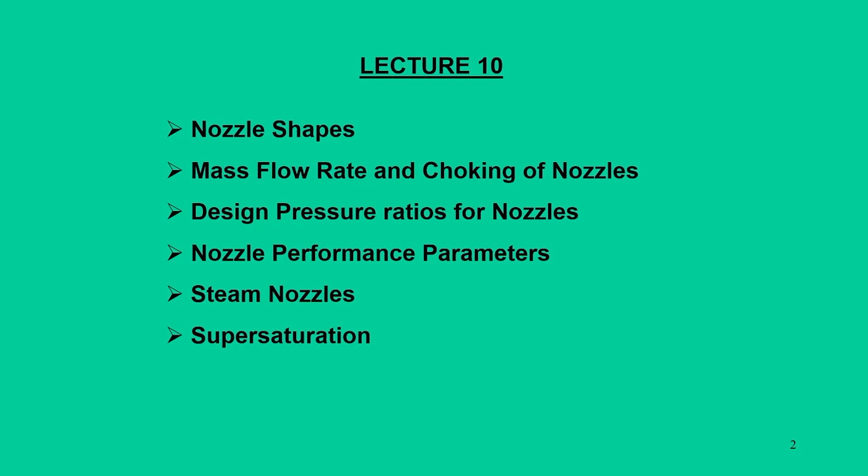This means that nozzles can be designed for gas, which may be a perfect gas, or for liquids, water, or any incompressible fluid, or for steam nozzles. Steam nozzles fall in the area where we have a liquid-vapor mixture as well. Now, under what circumstances, and which different thermodynamic parameters govern this, so that we can apply the basic theory of nozzles while handling steam.

Moving further, steam nozzles normally encounter vapor and liquid simultaneously. There is a concept called supersaturation, a very common phenomenon that occurs in steam nozzles, and this supersaturation is nothing but an irreversible phenomenon. We will discuss its aspects, how this supersaturation phenomenon takes place in steam nozzles.

Now let us revisit our previous discussions where we discussed nozzle shapes. We derived from thermodynamic equations how flow through nozzles happens. Based on that, for any given nozzle where the area changes within a particular direction, we can find the flow velocity by knowing the enthalpy conditions at the inlet.

Then we have the fundamental equations, that is the mass flow rate, which is m dot equals rho into A into C, divided by V, which stands for specific volume. So we arrive at an expression which we call area per unit mass flow, that is A by m dot equals V, specific volume, divided by square root of twice H1 minus H plus C1 square.

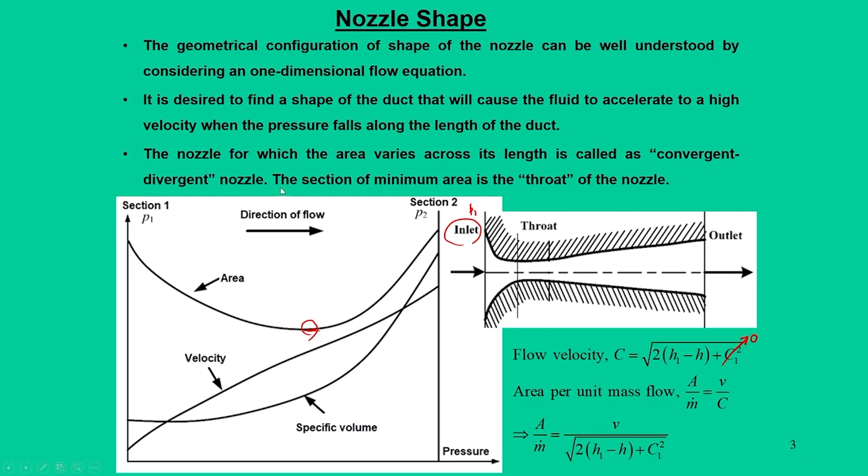Throat means this is the minimum dimension that we come across. So, the nozzle for which the area varies across its length is known as convergent-divergent nozzles, and the section of minimum area is called the throat.

In most applications, there are two types of nozzles that we normally come across. One is mainly convergent, which is mostly used for incompressible fluids or liquids. When you deal with gas, it is normally preferred to have a convergent-divergent nozzle.

Now let us understand the basic difference between these two. When you deal with only convergent nozzles, the outlet area is always less than the inlet area, which means minimum area is always encountered at the outlet itself. Whereas in a convergent-divergent nozzle, in most cases, the initial portion area is made larger so that C1 is close to 0, and then it is suddenly brought to the minimum area. This means the flow at the initial state is almost stagnant, or velocity is very negligible compared to the flow velocity at any other cross section.

Considering this fact, all convergent-divergent nozzles are designed so that in the initial portion the geometry goes from larger area to minimum area, and the rest of the expansion takes place in the diverging portion, which is normally regulated by the pressure ratio between the throat and outlet conditions. We will come back to this point later.

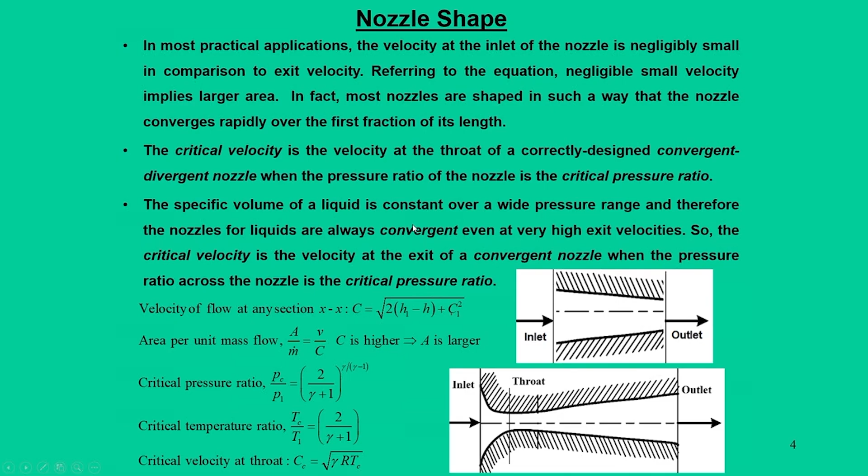So, these are some of the important aspects of how these nozzle shapes are decided.

Then we will move on to the next important topic: for a given nozzle, how do you find out the mass flow rate, and based on this mass flow rate, whether the flow is choked or not. Choking is a phenomenon which says what is the maximum mass flow rate a nozzle can handle, or in other words, what is the maximum velocity we can achieve. So, for that, let us try to understand the first case.

When looking at convergent nozzles, we have some inlet state and an exit state. Initial pressure is P1, meaning the nozzle operates between two thermodynamic states: P1 and the back pressure. Back pressure is the term we use when the flow expands to a particular space, the pressure of that space is known as back pressure. That back pressure can be regulated as we want. By controlling this back pressure, we can define what velocity we can achieve in the flow, or what will be the exit velocity at the minimum area in a convergent nozzle.

Now let us understand that at the beginning, when the flow does not occur, P1 and PB are equal. Let us see under what conditions the flow will initiate in the nozzle.

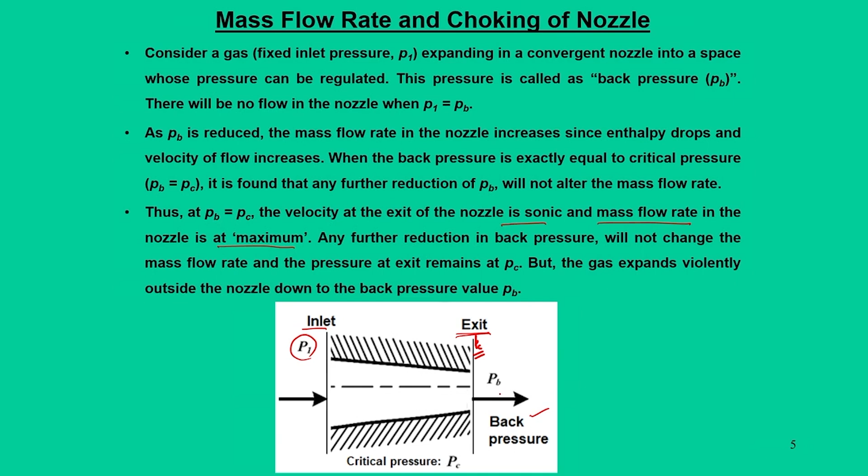So whatever expansion the nozzle is going to give, it has given, but the subsequent expansion from PC to PB happens at the exit of the nozzle. Now let us see that when you have this maximum mass flow rate in the nozzle, it happens when you have this critical pressure ratio.

Critical pressure ratio is nothing but the pressure PC divided by P1. P1 is the inlet condition of the nozzle, and for that we have expressions like critical pressure ratio, critical temperature ratio, critical velocity at the throat, that we derived in our previous lecture.

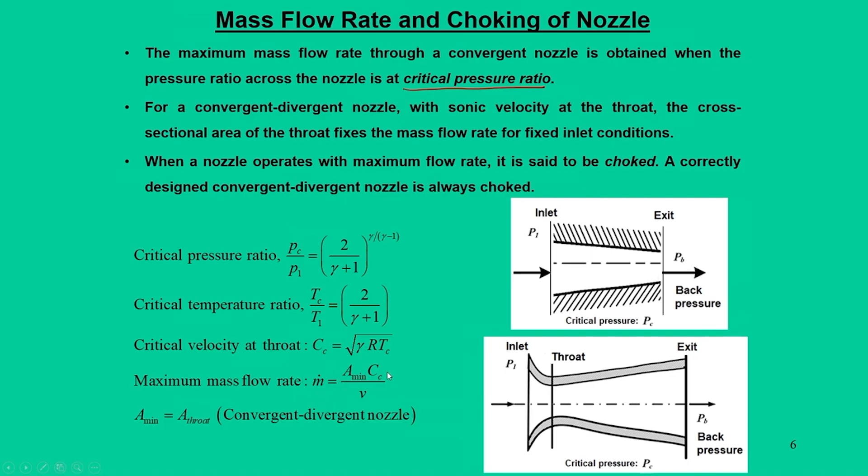And now, under these conditions, once you have this critical velocity at the throat, then we can find out the mass flow rate based on the information of critical velocity and minimum area of this throat. Okay, now let us understand more details of the practical utility, how these nozzles are normally operated.

In fact, when you design this nozzle, we have two conditions. One is through the area information, because the minimum area will give you the choke conditions. At the same time, the other parameter that regulates the flow is the pressure ratio or pressure difference across this nozzle. So side by side, the simultaneous effect of area change plus the pressure difference will decide what velocity we are going to achieve and what is the physical behavior or nature of the flow in the nozzle. Based on that, we will discuss two important concepts.

One is called under expansion in the nozzle, the other is over expansion in the nozzle. Previously we have shown that at the minimum area you will get the sonic conditions, and that is nothing but the critical condition. At that critical condition, the flow is choked, as long as that critical pressure ratio is maintained.

But not necessarily will we always have choking in the nozzles, because the back pressure is the main culprit, because that normally decides whether the flow will be choked or it will have some other effect. So let us understand what happens in a convergent nozzle, that means how do you talk about the design pressure ratio. Design pressure ratio is normally given by the pressure ratio at the inlet conditions to the minimum area conditions.

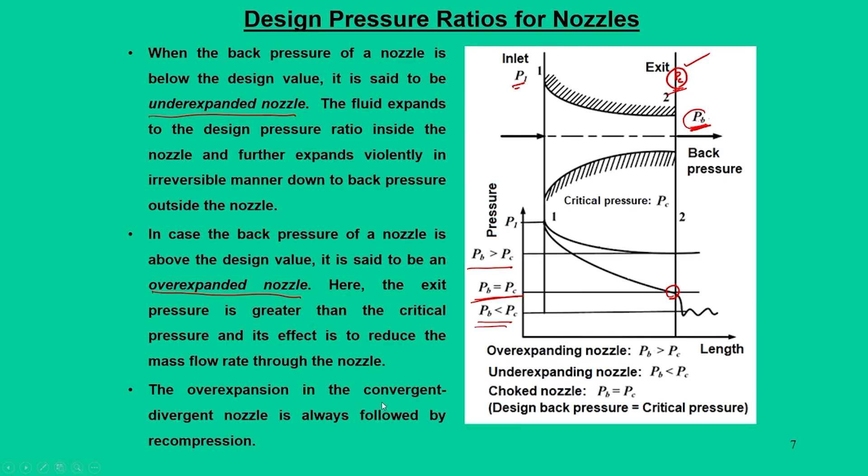Let us see what happens in a convergent divergent nozzle. The shape of the nozzle is designed such that within a certain smaller length it achieves the throat, which is the minimum area. Flow initially at inlet condition P1 suddenly changes area to the minimum area, then the divergence portion happens. Whatever expansion mostly takes place in this diverging portion only.

Since the minimum area occurs at the throat, the critical condition will be achieved at PC, that is PC, TC, or CC, achieved at the throat condition. But the exit condition is now governed by this throat condition, meaning we can get information at the exit condition 2, which we interpret as PR, the exit condition for a convergent divergent nozzle. Once you know the information at the throat, we can get back the information of the exit conditions.

We have one more piece of information, the exit pressure PR, normally called the design pressure, along with the back pressure. The possibilities are: PB can be greater than PR, or PB can be less than PR. Same concept as whether the flow is an over expanding nozzle or under expanding nozzle.

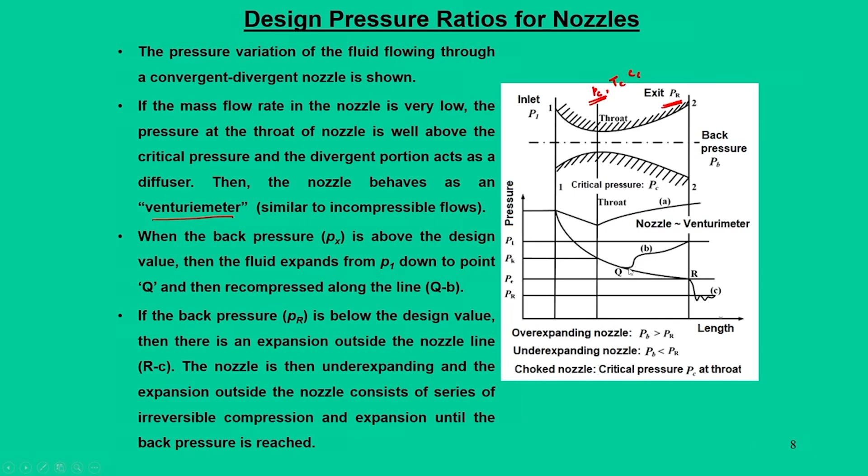Beyond this pressure, the definition of the nozzle takes place as either under expanded or over expanded. When we have an over expanding nozzle, PB will be greater than PR, and when under expanding, PB will be less than PR. In between, flow expansion can take place; at some intermediate pressures, if the throat condition is achieved, the flow will try to expand in the diverging portion, but there will be recompression because adequate back pressure is not maintained.

Now we move to the nozzle performance indicators. We have come across these terms previously while dealing with turbines, steam turbines, but for continuity let me repeat these parameters again. Three important parameters are considered for nozzle design.

One is nozzle efficiency, defined as the ratio of actual enthalpy drop to the isentropic enthalpy drop between the same pressures. The second parameter is velocity coefficient, defined as the ratio of actual exit velocity to the exit velocity when the flow is isentropic between the same pressures.

The third one is the coefficient of discharge, which is defined as the ratio of actual mass flow rate of the nozzle to the mass flow rate which would pass if the flow is isentropic.

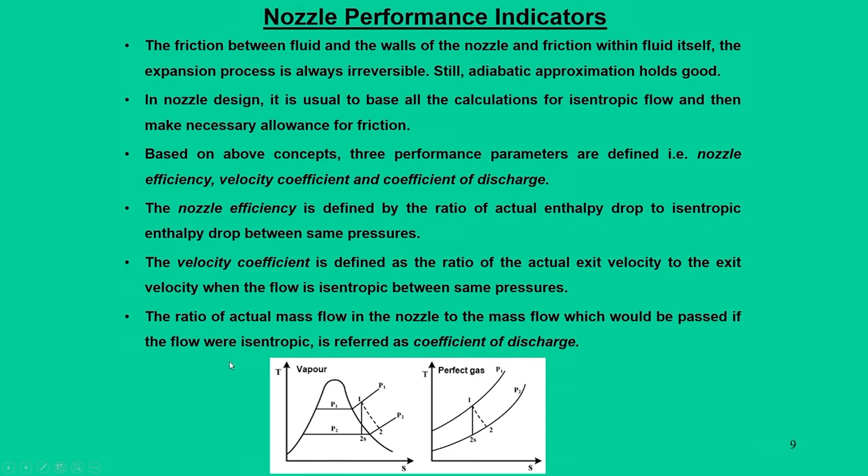Based on our definitions, mathematical expressions are given here referring to this figure. There are two cases. One is when dealing with vapor, particularly steam nozzles, where the flow expands from superheated vapor and falls into the dome of liquid-vapor mixtures. The process can take place isentropically from 1 to 2s, or actually from 1 to 2.

But when dealing with a perfect gas, there is no dome. So between two pressure differences, we can say the expansion takes place isentropically from 1 to 2s, and in an irreversible manner from 1 to 2.

Once we know this information, we can recall our definitions to calculate nozzle efficiency eta n, velocity coefficient Kv, and coefficient of discharge Cd.

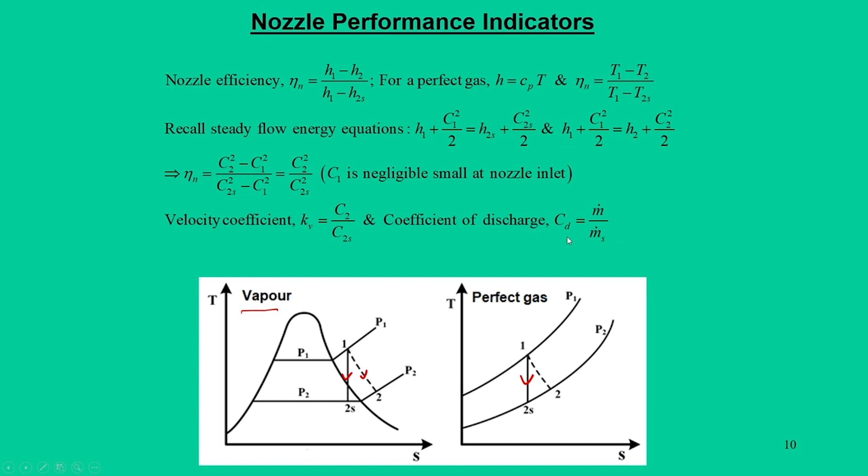Moving further, we have emphasized what type of fluid we typically handle in nozzles. It can be a gas, perfect gas, or air. Another category is vapor, particularly when water vapor or superheated steam expands in turbines.

The shape of this passage in turbines has a particular fashion, which we call a curved axis steam nozzle. For nozzle calculations, these are basically nothing but convergent-divergent nozzles.

In the initial part, it starts from a big area and converges suddenly to the minimum area, which is the throat. Then we design the diverging portion based on the area available at the throat.

Normally when using these nozzles for perfect gas, the divergence angle, referred to as theta, is always kept below 20 degrees, because if it's more, there will be a breakaway of the fluid from the duct wall, increasing friction losses.

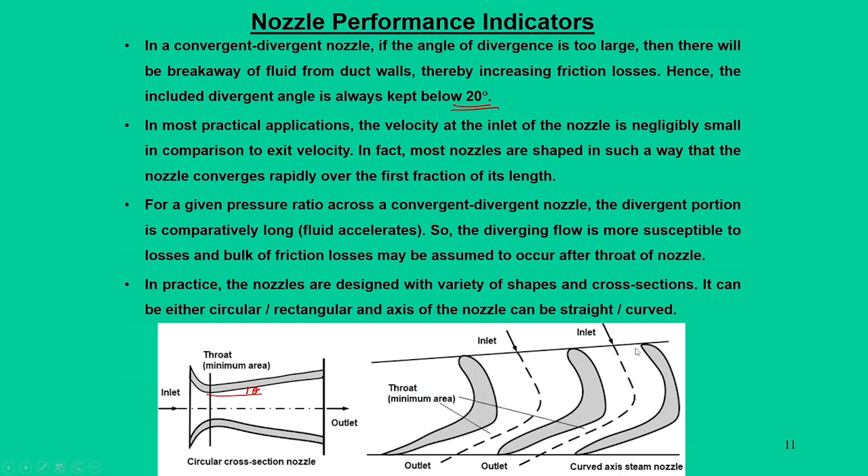So steam nozzles are generally curved, while nozzles used for perfect gases can be either circular or rectangular. The main difference is that convergent-divergent nozzles are intended to generate thrust, while curved axis nozzles are intended to generate power.

Now we will move on to the next topic, steam nozzles. Until this point we have discussed theoretical aspects of nozzles mainly dealing with gases. When discussing steam, the same thermodynamic concepts can be used with reasonable approximations.

For example, for isentropic flow of gases we use Pv to the power gamma equals constant, but for steam, gamma is replaced by a parameter k, which is the polytropic index for steam.

The rest of the theory remains as it is. So by replacing gamma with k, we can get good estimates for critical pressure ratio, critical velocity at the throat, and other cases.

Now, when you deal with these steam nozzles, the initial state of the steam can be at superheated state or it can be at saturated state. So there are two cases, one is dry saturated, other is superheated state.

For that, a suitable approximation has been made, for which K was taken as 1.135 for a dry saturated state of steam in the nozzle, and K is equal to 1.3 for superheated state of the steam entering in the nozzles. So based on that we can simplify all these expressions.

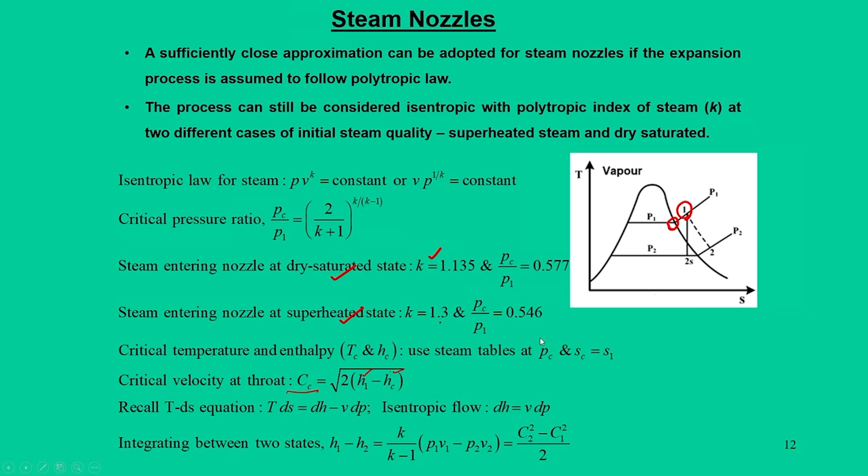We can also find out the critical velocity of the throat. Of course, here another difference we will have to see is that instead of using enthalpies as Cp times T, we have to use steam tables, because it will not give good approximations. Based on that we can recall our TdS equations, then we can find out the enthalpy difference between two states. So these are some theory which you can apply to find the state of the thermodynamic states while dealing with the steam nozzles.

Now, moving further, for steam nozzles, when you think about the expansion in the nozzles, another practical phenomena that drops in, which we call as super saturation. Similar term super saturation we also encounter when dealing with steam turbines as well. For the sake of continuity we will move a little bit more into what this state is, because this super saturation state is an irreversible phenomena and normally it is called as metastable state.

So what it means is that if you recall our Mollier diagrams, HS diagrams and temperature entropy diagrams, here we see that steam in its superheated state, that is state 1, expands from the pressure P1 to P2, and this expansion process occurs in an isentropic manner.

So 1 to 2 is the expansion process which occurs in an isentropic manner. Now, since it is a liquid vapor mixture, we can think of a dome, construct the dome, and while expanding from 1, the steam crosses this dome at point A, which means we can divide this entire expansion process 1 to 2 as 1 to A and A to 2. So here also in the Mollier diagram we draw the process in this manner.

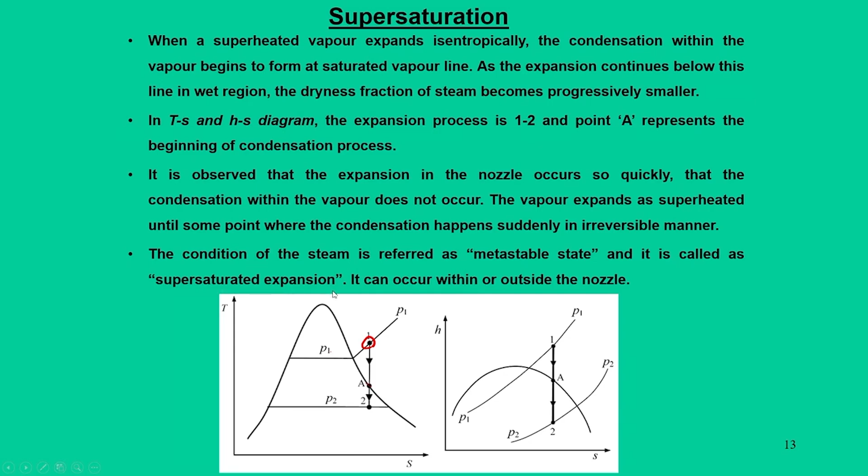But what it says is that when it reaches almost at point A, that means when it touches the saturation point at A, the steam is said to be at a condition called metastable. Why? Because although it is a superheated state, it expands further down the line, which means at point A the condensation is supposed to occur. But unfortunately, since the dynamics of this change is so fast, the fluid does not condense instantly. It takes some finite time, and after that finite time the condensation starts. So instantly the condensation does not happen. The condition of the steam at that particular state we call a metastable state, and the expansion is known as super saturated expansion, and this can occur within the nozzle or outside the nozzle.

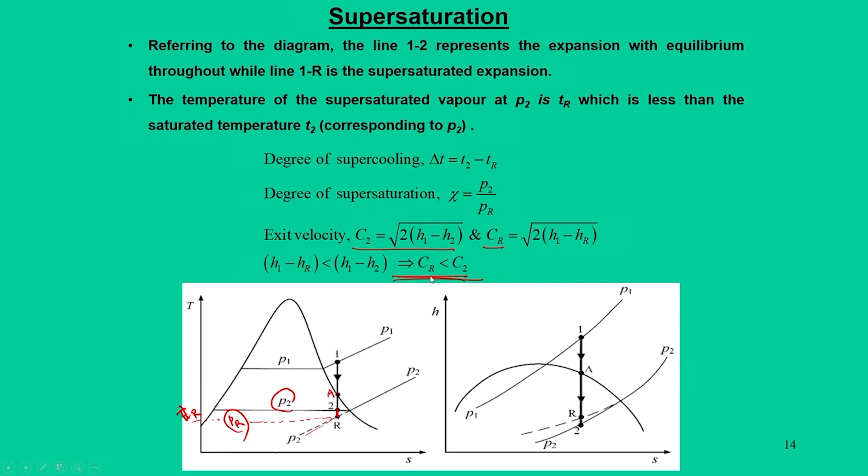Another way of interpreting the supersaturation phenomena is that we can find a parameter chi, defined as the ratio of P2 by Pr. We can have two exit velocities: one when the steam goes from 1 to 2, and another, Cr, when it goes from 1 to R. From this we can say that Cr, the exit velocity in the supersaturation case, will be less than C2.

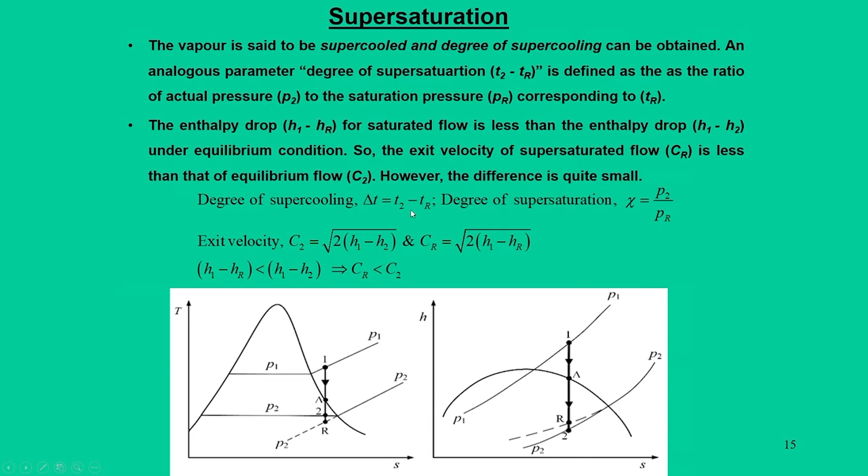Moving further, we can also get the information of enthalpy drop, and the degree of supersaturation. Then, going back to the final curve in the PV, pressure versus specific volume plot, it will give information about the mass flow rate, because for mass flow rate we require the specific volume information.

Now the same phenomena is plotted: when the expansion process takes place from 1 to 2, we have two constant pressure lines P1 and P2, and while going from 1 to 2, it interacts with this dome at point A. That means at this point the steam interacts with the saturation point. Here the steam tries to condense, but it does not condense instantly or suddenly. It takes some finite time to continue this condensation process.

During this process, if the expansion takes place from 1 to 2, we will have a specific volume V2. Now, if the expansion has to take place from 1 to R, we will have specific volume Vr. So as you can see, Vr is less than V2.

Based on that, we can apply the isentropic law for the steam: from process 1 to A, Pv to the power 1.3 equals constant, because we are starting from superheated steam. Now from A to R we can use Pv to the power 1.135 equals constant.

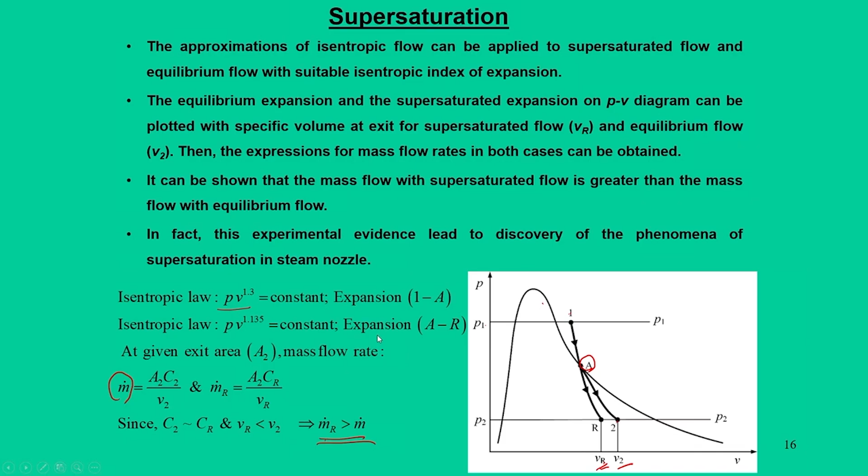So with this we say that the supersaturation phenomena is a very critical aspect for steam nozzles as well as for steam turbines. With this, we conclude the nozzles topic.

Now we will try to solve some numerical problems based on our discussions today. The first problem talks about a situation when a fluid enters a converging nozzle starting with an initial condition of 7 bar and 100 degree centigrade, and expands isentropically to a space maintained at 3.5 bar. We do not know the fluid conditions, so we have to find the mass flow rate per square meter of the exit area, first when the fluid is helium and then when it is ethane. Let us understand the physical concept of this.

We have a converging nozzle. The initial condition is P1 is 7 bar, T1 is 100 degree centigrade, that means 373 Kelvin, and condition 2, the space, is maintained at 3.5 bar. So you can call this the back pressure Pb as 3.5 bar.

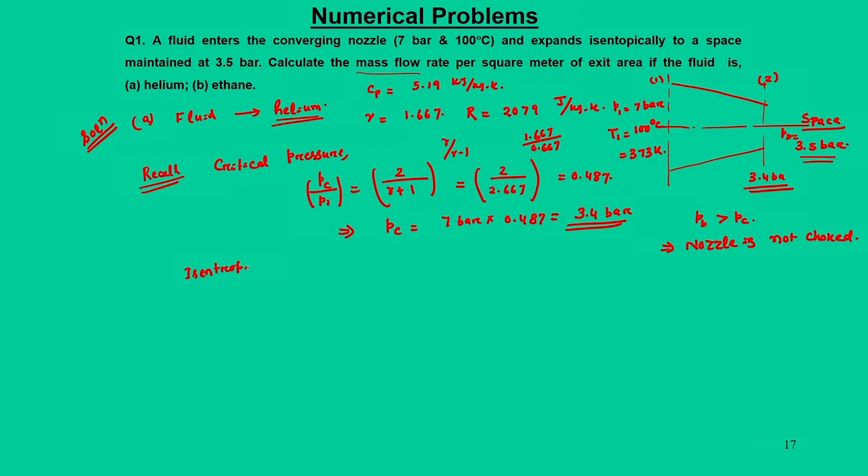So isentropic relation means we need to find out T1 and T2. So T1 by T2 relation, we can say P1 by P2 to the power gamma minus 1 by gamma. So P1 is 7 bar, P2 is 3.5 bar, because back pressure is 3.5, to the power 1.667 minus 1 by 1.667. So this ratio is 1.32, which means T2 would be T1 by 1.32, T1 is already 373 Kelvin. So T2 would be 285.6 Kelvin.

Once we know this T2, we can find out C2, which is square root of twice times H1 minus H2, that is twice Cp times T1 minus T2, square root. So we know Cp, that is 2 into 5.19, T1 is 373 minus T2 is 285.6, square root. So C2 we can find out is 952.5 meter per second.

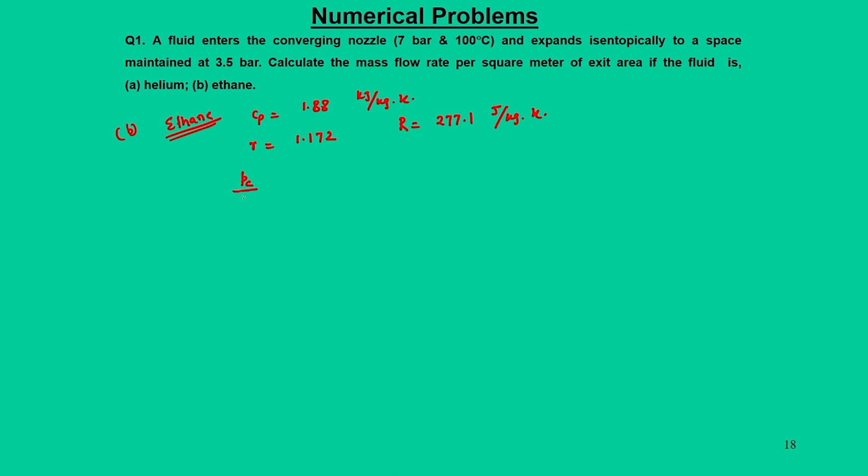So first we need to know the critical pressure, Pc by P1, that is twice by gamma plus 1 to the power gamma divided by gamma minus 1. By putting this, we say twice by 1.172 plus 1, to the power 1.172 divided by 0.172, that is 0.57, which means Pc would be, P1 is 7 bar, so Pc would be 0.57 into 7, that is 3.99 bar.

Now, since we say Pb is less than Pc, that is 3.5 bar is less than Pc, which means the nozzle is choked. So once the nozzle is choked, we have to use the choking relation.

That is Tc by T1 is equal to twice by gamma plus 1, that is equal to 0.92. So from this we get Tc as 0.92 into 373, that is your T1, so 343.5.

So we say your C2 would be 334 meter per second, and that C2 is square root of gamma R Tc. So Tc we have 343.5 Kelvin, and C2 we get this.

Now once you have C2, we can find out Vc, that is R Tc by Pc. So R is 277.1, Tc is 343.5, divided by Pc, which is known, that is 3.99 into 10 to the power 5. So this is 0.2385 meter cube per kg.

So then we have m dot is equal to A2 C2 by V2, which means our main intention is to find out what is m dot by A2.

So, Tc is 343.5 Kelvin, Cc is equal to square root of gamma R Tc, that is 1.172 into R is 277.1 into 345.5 square root.

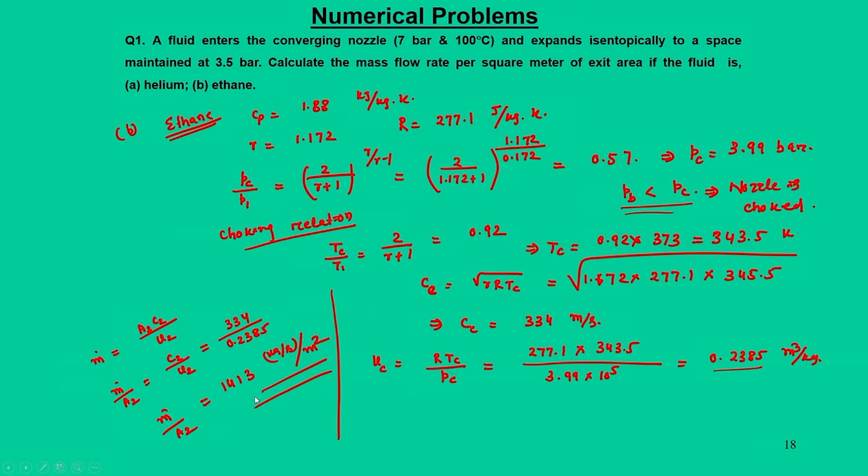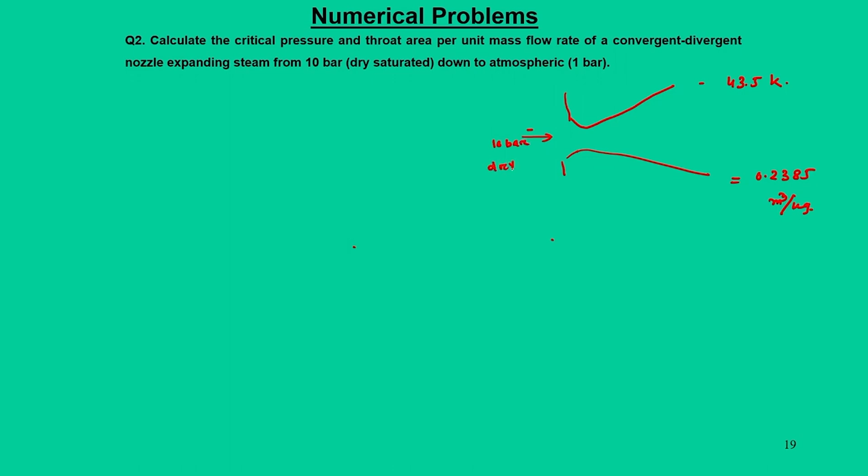So, in the last problem we talk about a steam nozzle problem, which says that in a steam nozzle the flow expands in a convergent divergent nozzle from a condition which is 10 bar dry saturated, and it expands to a location where it is atmospheric, which is 1 bar. So, we need to find out the critical pressure and throat area.

So, this is your throat area Ac, and if you try to plot it in a temperature entropy diagram, initially the steam is at superheated state, point 1 can be located at 10 bar, point 1 can be located at the dome, that is 10 bar dry saturated, and it expands to a condition C, and this condition is nothing but your critical conditions.

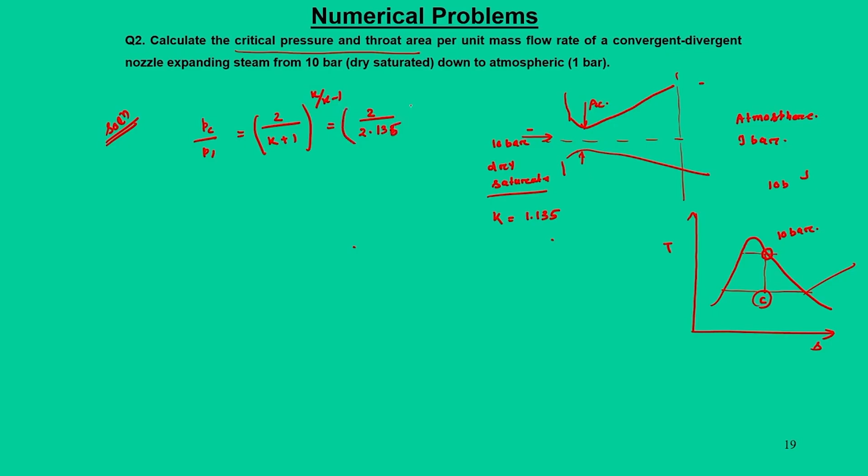So, for that we have to recall the expressions for Pc by P1, that is twice by k plus 1 to the power k by k minus 1. And since it is dry saturated, we can take k as 1.135. So, by putting this we say it is 2 by 2.135 to the power 1.135 divided by 0.135. So, we can say Pc by P1 ratio, that number we get is 0.577.

So, we can find out what is critical pressure, initially it is 10 bar. So, it is 5.77 bar. So basically steam expands from 10 bar to a critical pressure at throat, typically it will happen at the throat. And once we know these critical pressures, then we can find out the other conditions.

Other conditions we require: the throat area. To calculate this throat area, we require also mass flow rate. So from this we have to say that state 1, so we have to refer steam table. State 1 we say P1 10 bar dry saturated, which means we can find out its entropy S1 as 6.5863 kilojoule per kg Kelvin, then H1 as 2778.1 kilojoule per kg, and state 2 critical condition or state C we can find out Hc.

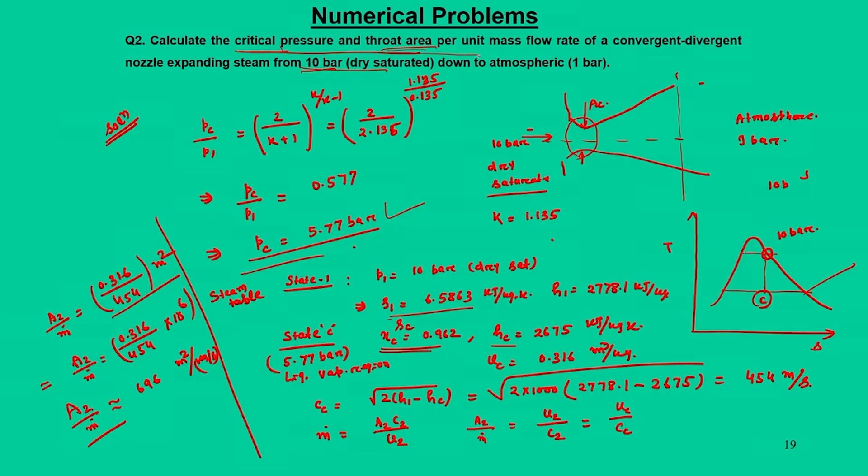And if you convert it to mm square, it will be 0.316 by 454 into 10 to the power 6. So this is approximately 696 millimeter square per kg mass flow rate. So we got this critical pressure Pc, and we also found out the throat area per unit mass flow rate, 696 millimeter square. So with this I conclude.